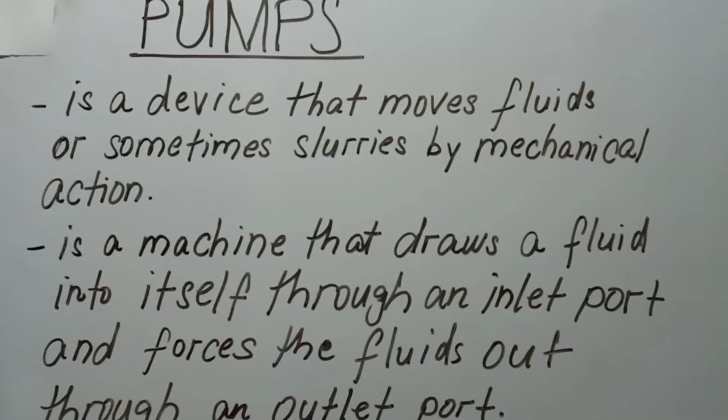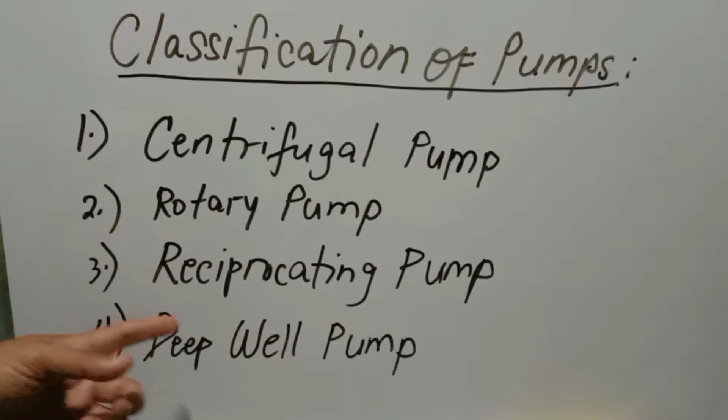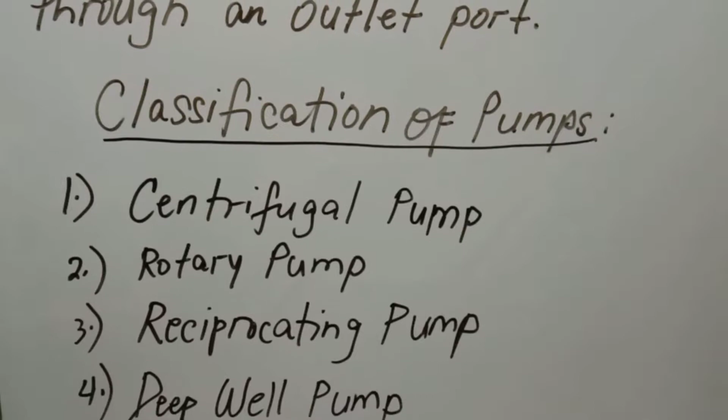Okay? So to continue further, we have here the classification of pumps: centrifugal pump, rotary pump, reciprocating pump, and deep well pumps. So to understand further regarding this pumps equipment, I will give you some example word problems related to pumps.

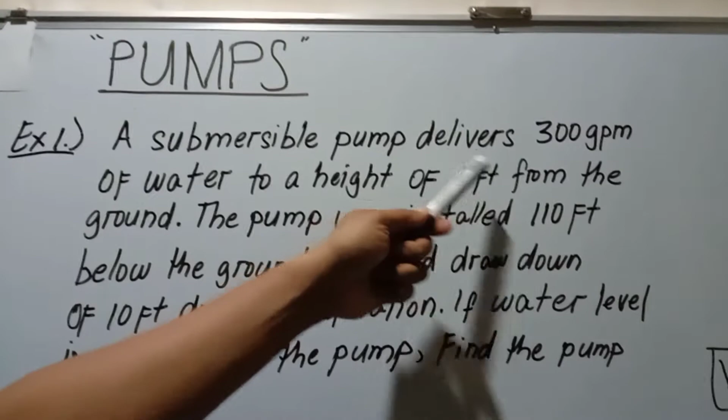Guys, we're back again. As I mentioned earlier, I'm giving you some examples of pump problems which we have encountered in some field applications, okay? So, the problem states that a submersible pump delivers 300 GPM. GPM means gallons per minute. 300 gallons per minute of water to a height of 6 feet from the ground.

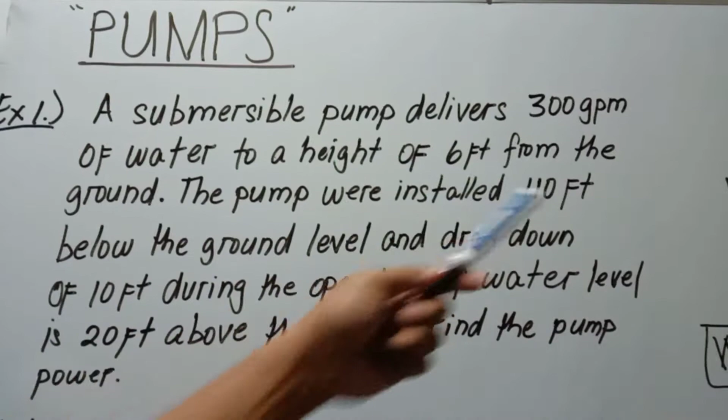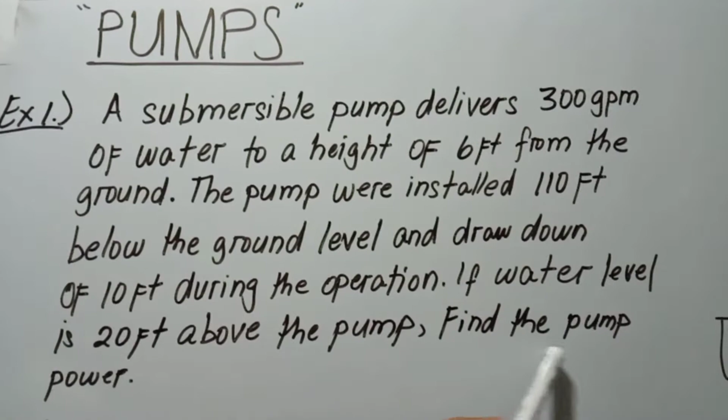Okay. The pump was installed 110 feet below the ground level with a drawdown of 10 feet during the operation. So, if the water level is 20 feet above the pump, find the pump power in terms of kilowatts. So to solve this problem, the requirement here is to find the pump power.

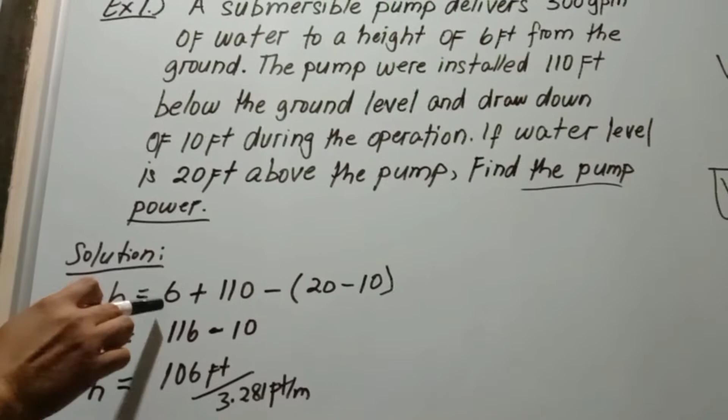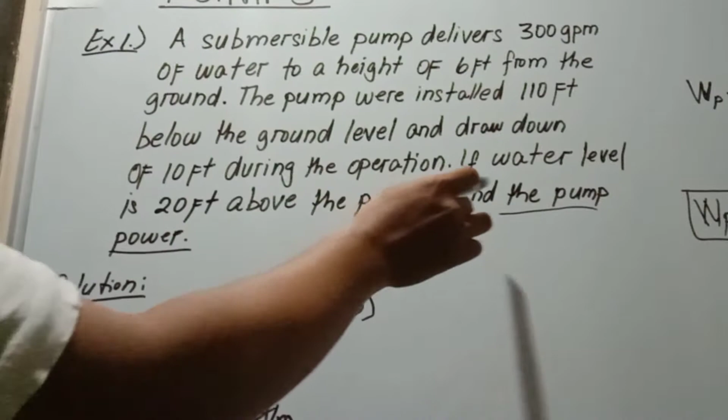So, solution. First, we need to find the head of the pump, H is equal to, since it is given here, 6 feet, water to a height of 6 feet, plus 110 feet. The pump was installed 110 feet below the ground, okay? 6 plus 110.

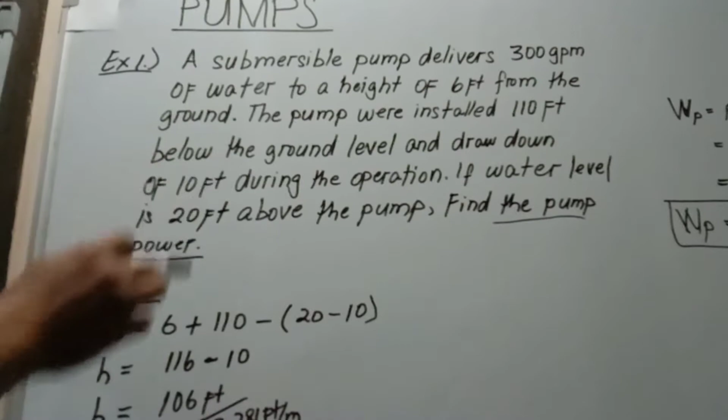Minus the water level, which is 20 feet, minus the drawdown of 10 feet. So to simplify this expression, head will be equal to 6 feet plus 110 feet is 116, minus the difference of these two values, which is 10. So head will be equal to 106 feet. 116 minus 10 is 106 feet.

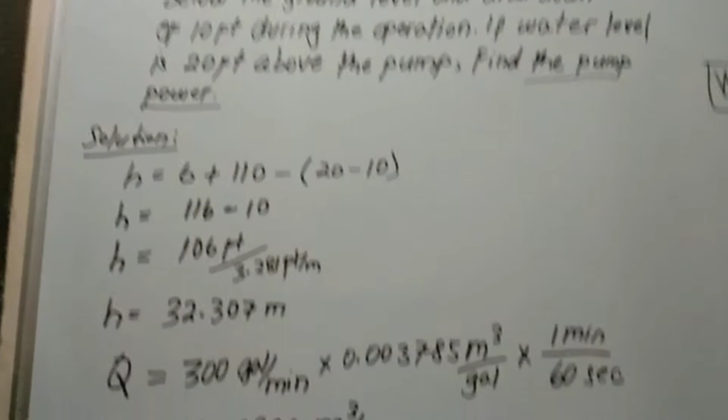Since the unit is in terms of feet, you need to be consistent. So to convert feet into meters, we divide 106 feet by 3.28, because 1 meter is 3.28 feet. Now, the head will be equal to 32.307 meters. That will be the pump head.

Now, to continue, we need to convert the flow rate of water, which is given as 300 GPM or 300 gallons per minute, into cubic meters per second, so that the pump power will come out in kilowatts. So we need to convert all these dimensions into SI, okay?

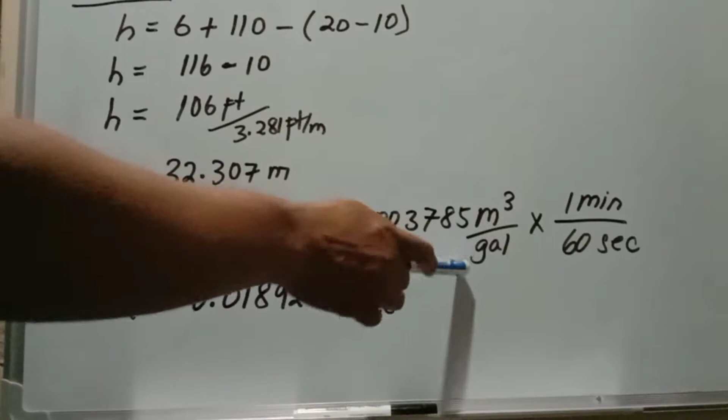So 300 gallons per minute times 0.003785 cubic meter per gallon. Cancel gallon. The remaining will be cubic meter per minute. Again guys, we need to convert minute into seconds. So times 1 minute per 60 seconds. For every 1 minute, we have 60 seconds. So cancel minute, and the remaining units will be cubic meter per second.

So the conversion for 300 gallons per minute into cubic meters per second is equal to 0.01892 cubic meter per second. Now we have the value for the head, which is 32.3 meters, and the flow rate of water, which is 0.01892 cubic meters per second.

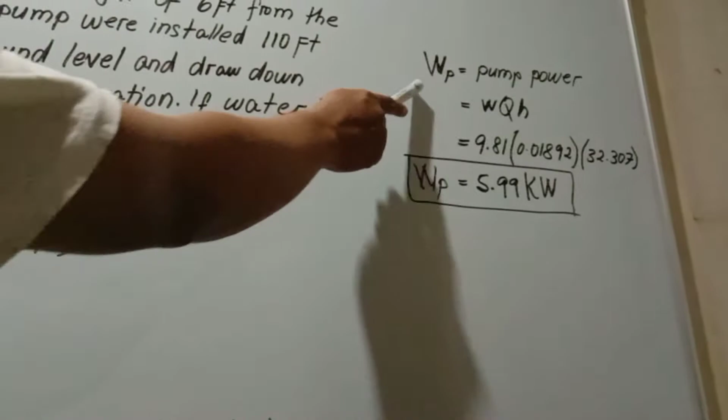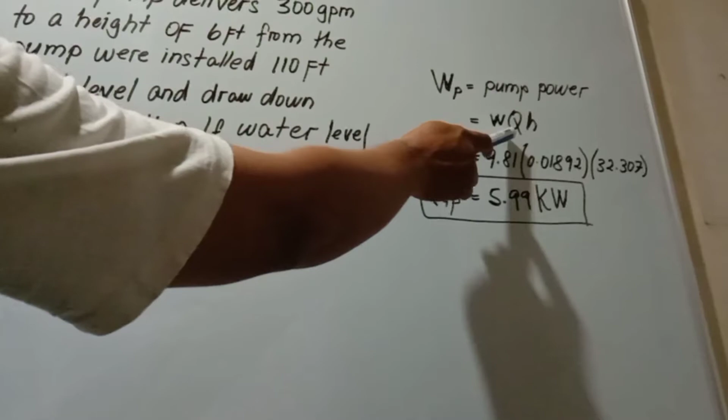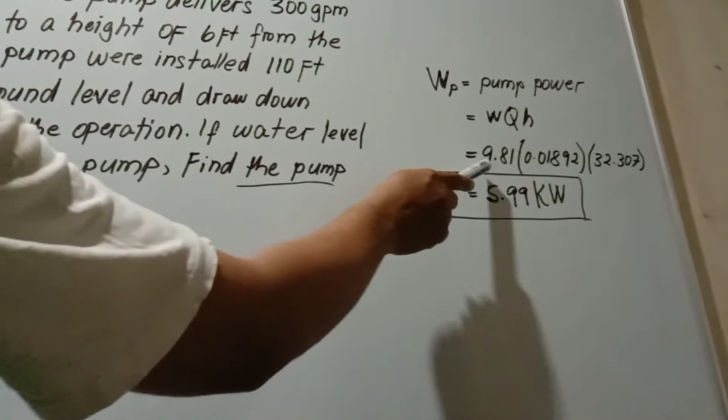Now to solve for the pump power, as we studied before guys, pump power is equal to unit weight of water times the flow rate times the head. So WQH. Our standard unit weight of water is 9.81 kilonewton per cubic meter, times the flow rate Q. How much is Q? As we computed here, 0.01892. So substitute this value, guys, into that equation.

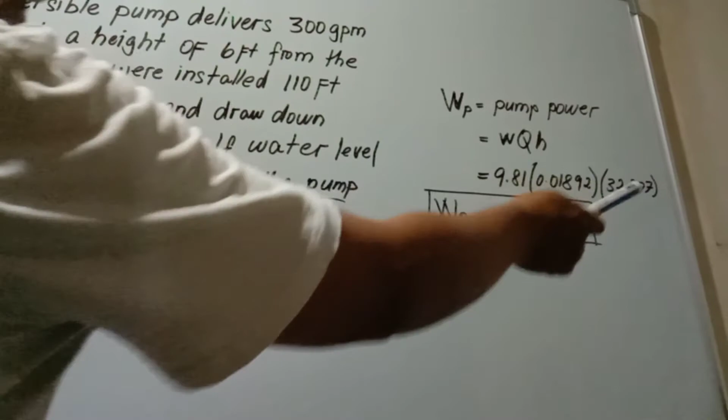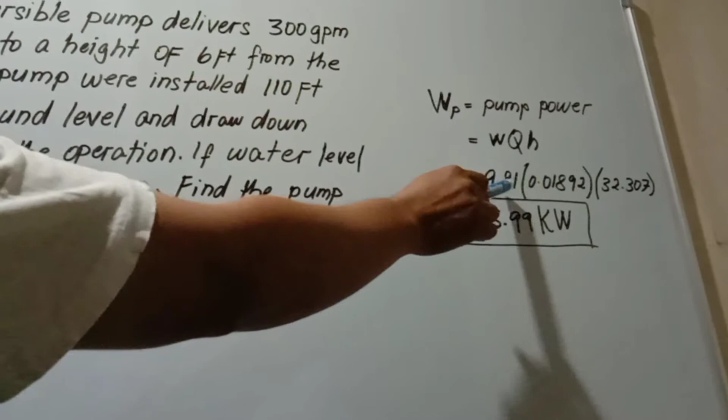0.01892 cubic meter per second. Take note guys, the unit for this Q is in terms of cubic meter per second, okay? And the unit for this unit weight of water is kilonewton per cubic meter, or 9.81 kilonewton per cubic meter. Times the head, which is in terms of meters.

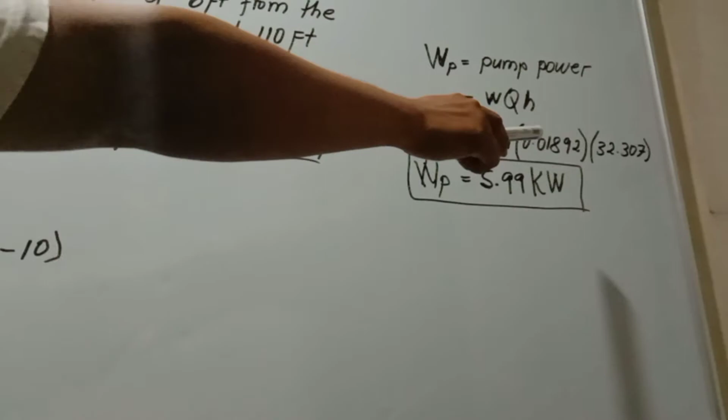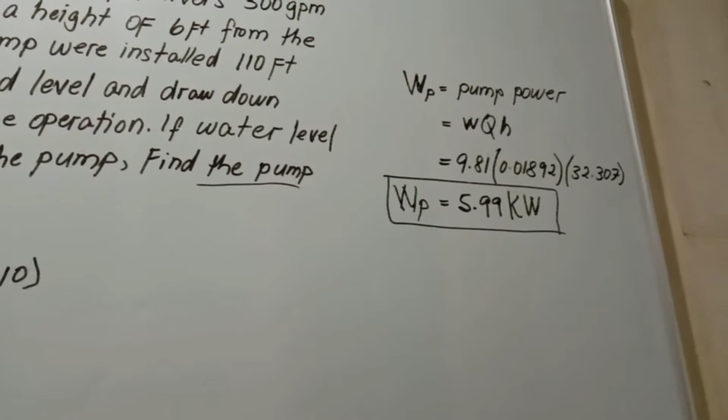So substitute this value guys to that equation. That's why it's written there, 32.307 meters. So just multiplying those values, the computed or resulting pump power will be equal to 5.99 kilowatts.

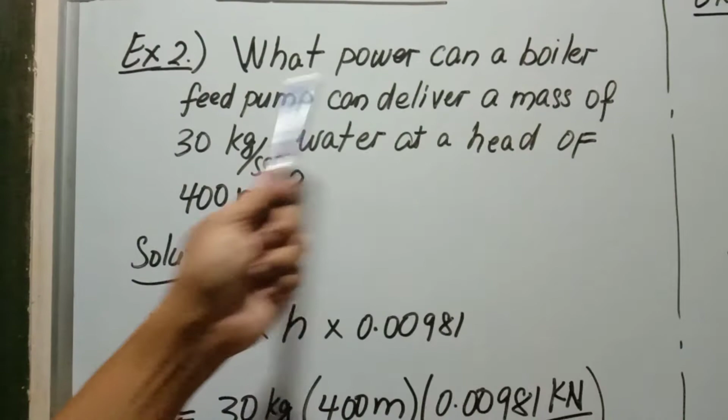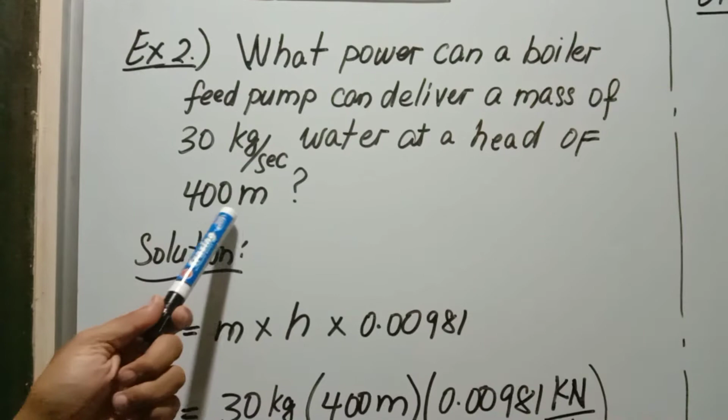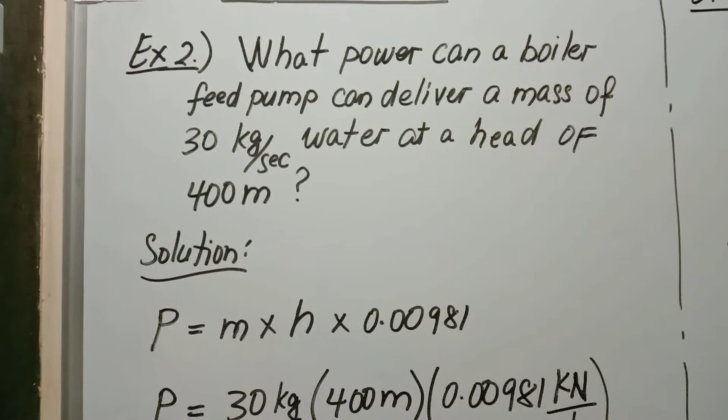Guys, we're back again. As I mentioned earlier, I will give you another example word problem for pumps. Example number 2. What power can a boiler feed pump deliver for a mass of 30 kilograms per second of water at a head of 400 meters? So guys, we are talking about a feed pump to deliver water in a power plant. We can find feed pumps in power plant applications.

So here we have the example. What power can a boiler feed pump deliver for a mass of 30 kilograms per second of water at a head of 400 meters? So a little bit far, it's 400 meters. Now to solve this problem, P is the power, which is equal to mass M, or mass of the liquid, which is given there, times the head, times the conversion factor.

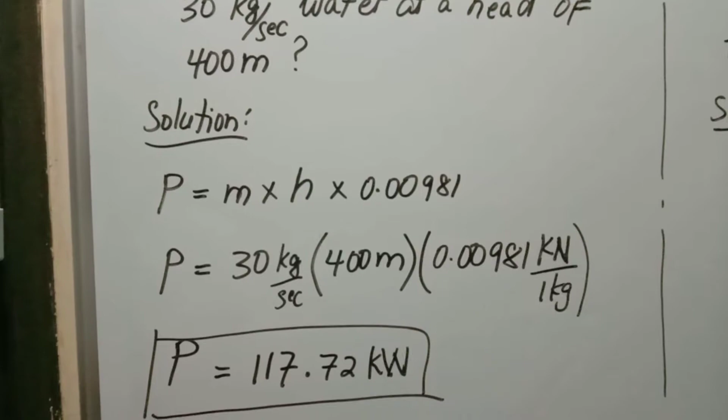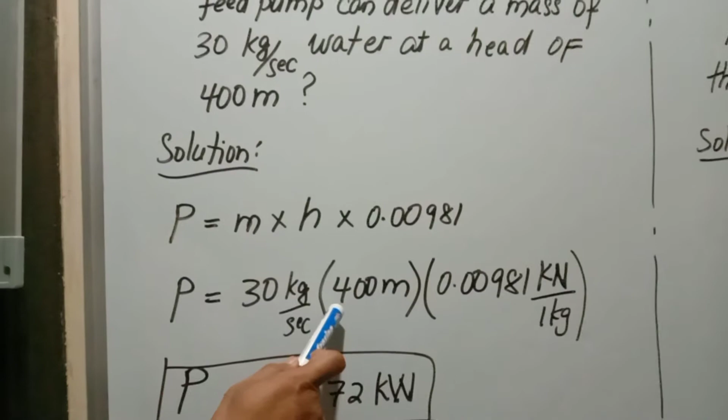Now since the mass unit is in terms of kilogram, we need to convert this kilogram into kilonewton rather. So this is the conversion factor for the kilogram, 0.00981 kilonewton per kilogram. So to solve further, we will substitute the values given in this problem. Mass here is given as 30 kilograms per second, times the head, which is 400 meters, times the conversion factor.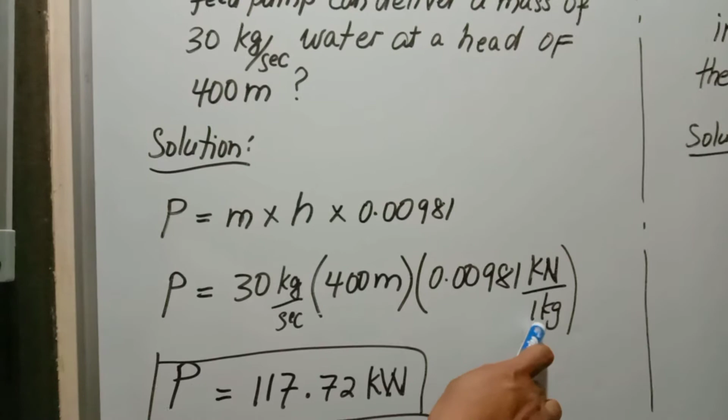This 0.00981 is simply like this, guys: 1 kg is equal to 0.00981 kilonewton. kN means kilonewton. So cancel this kilogram. The remaining units will be kilonewton meter per second. Since newton meter is joules, kilonewton meter becomes kilojoules. So kilojoules over seconds.

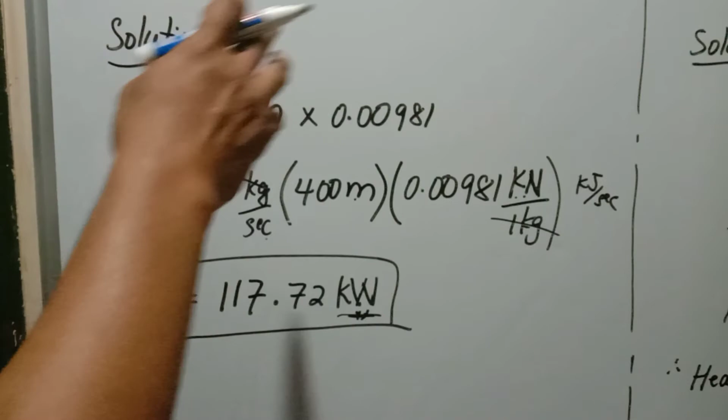As we know, guys, joules per second is equal to watts, so the unit will be in terms of kilowatts. kW means kilowatts. So the power required to deliver a mass of water to a head of 400 meters is 30 times 400 times 0.00981, equal to 117.72 kilowatts. So this is the required power for the feed pump, 117.7 kilowatts.

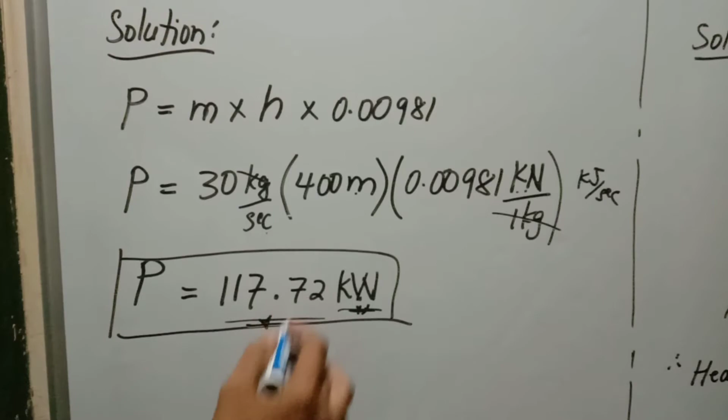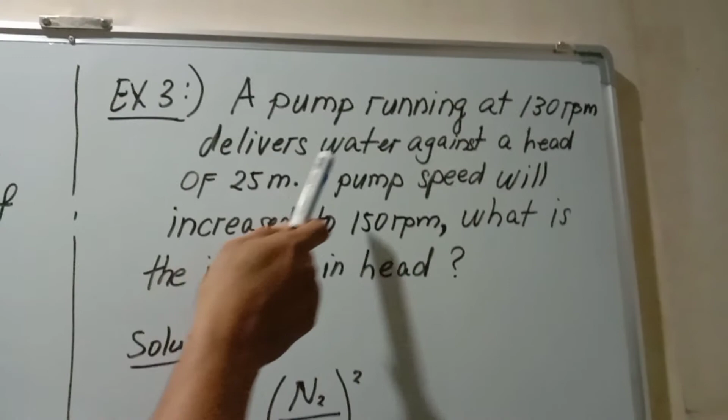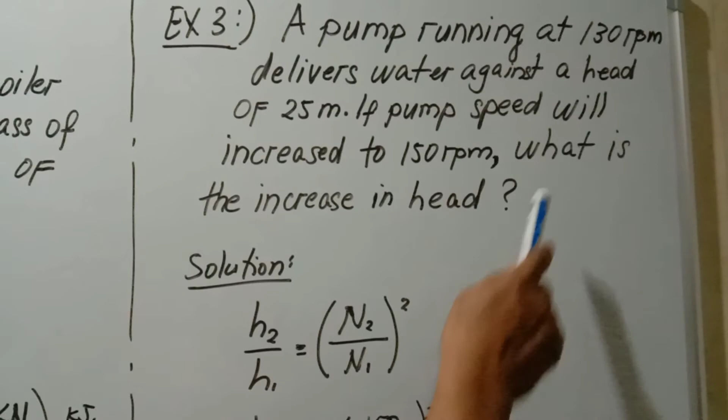So guys, another example we have here, example number 3. A pump running at 130 RPM delivers water against a head of 25 meters. So the pump is running at 130 RPM initially and delivers water at a head of 25 meters. Now, take note, guys, same pump. As we studied before, same pump but different speed. If pump speed increases to 150 RPM, what is the increase in head?

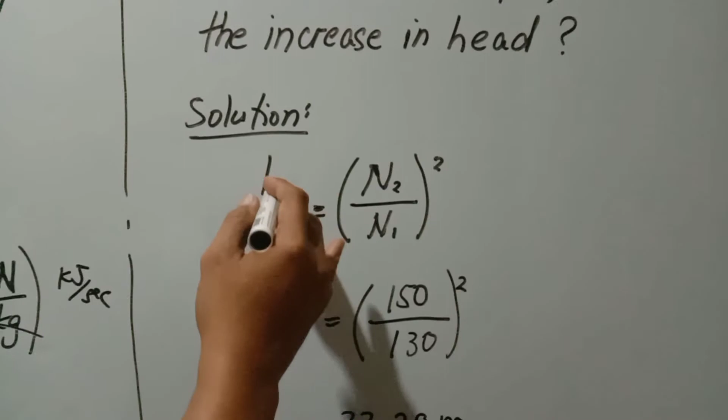So the requirement in this problem is how much the head increases in meters if we increase the speed of the pump from 130 to 150 RPM. Now, solution, we have this principle: the ratio of final head over initial head, H2 over H1, is equal to the ratio of the higher speed over the initial speed raised to the exponent 2, or squared, as we studied before for pump laws.

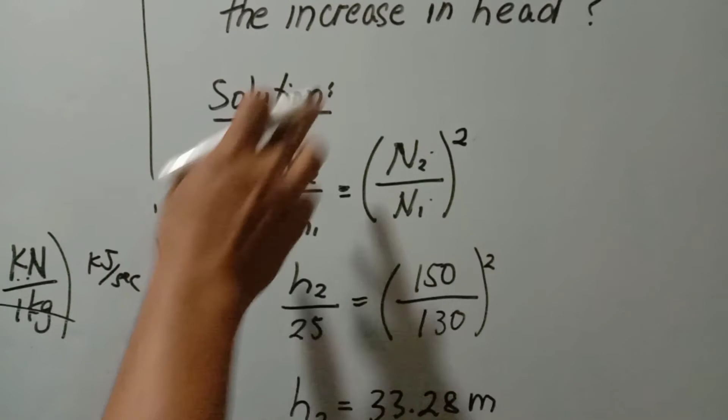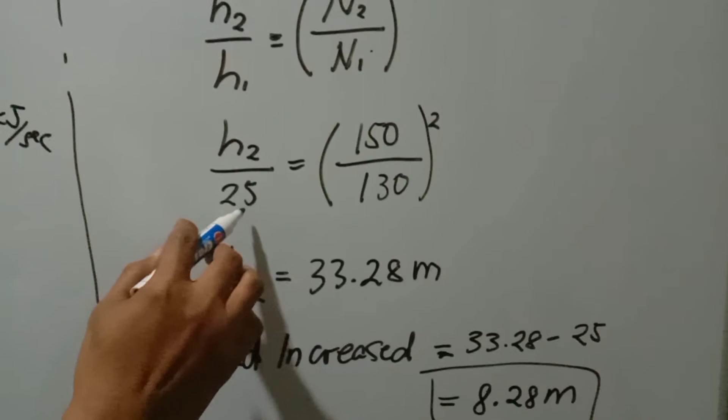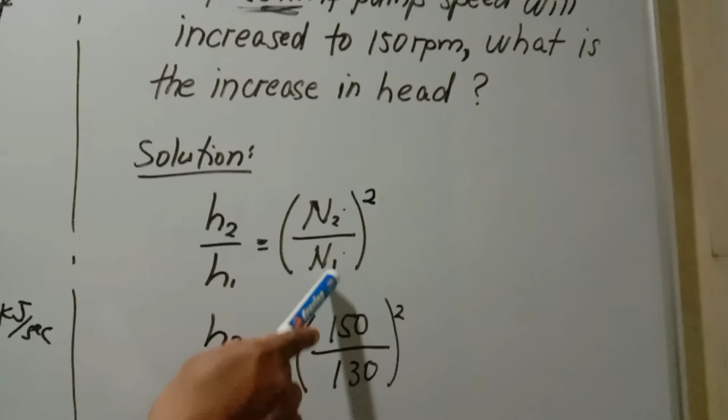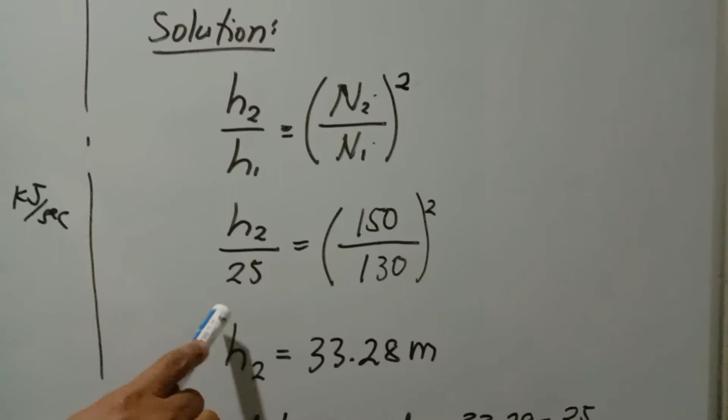So H2 is the requirement, which is the final head, and 25 is the initial head, given here as 25 meters. N2 is the final speed, which is 150 RPM, over the initial speed of 130 RPM, raised to the exponent 2. So to simplify this expression, head H2 is equal to 33.28 meters. M means meters.

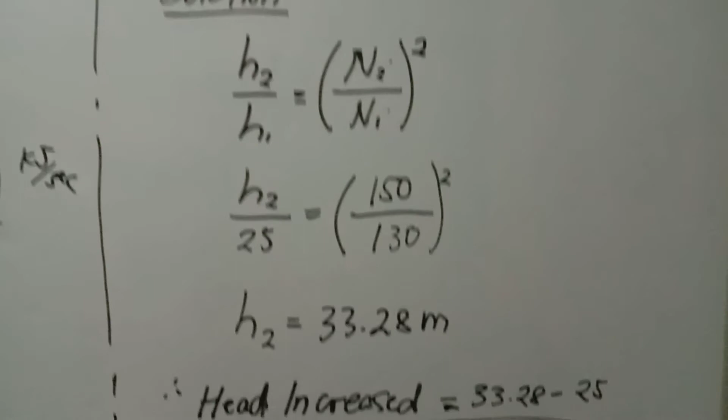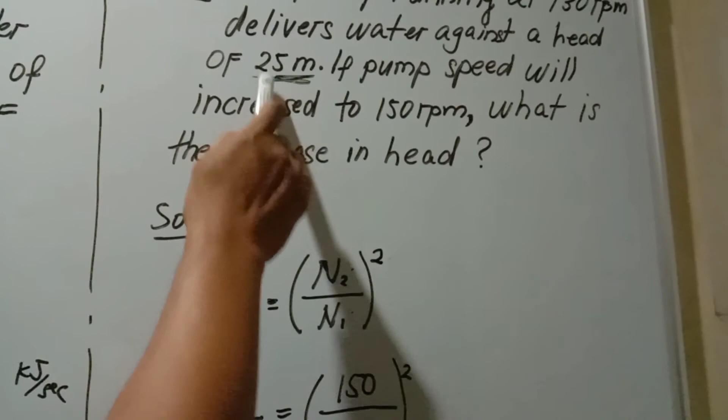Now since the requirement is the increase in head, the head increase is equal to the final head, 33.28, minus the initial head, 25. So it's the difference between the two heads, equal to 8.28 meters. 33.28 minus 25 meters is equal to 8.28 meters. So this is the head increase if we increase the speed of the same pump up to 150 RPM, so it's something like directly proportional.

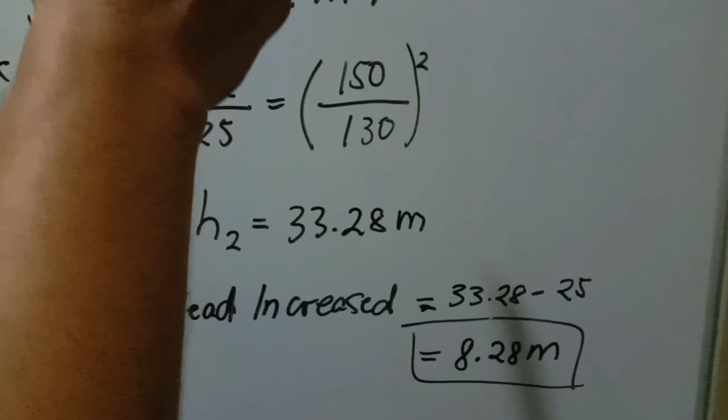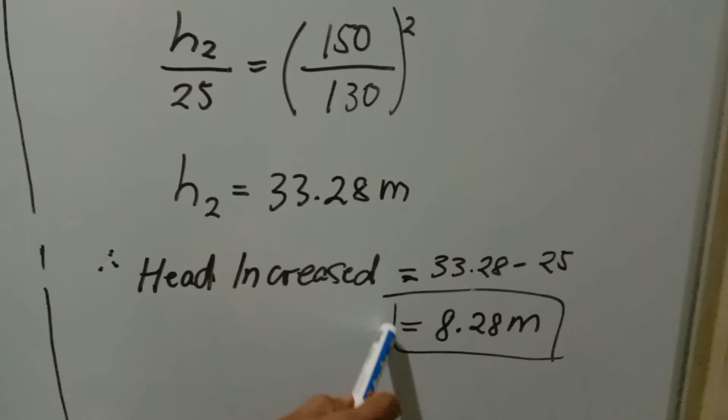If we increase the speed, automatically the head also will increase. So since we are talking about the increase in head, we simply subtract the initial head from the final head, which is equal to 8.28 meters. So this is the final answer, guys, for this particular problem. I hope you understand our example problems regarding pumps.